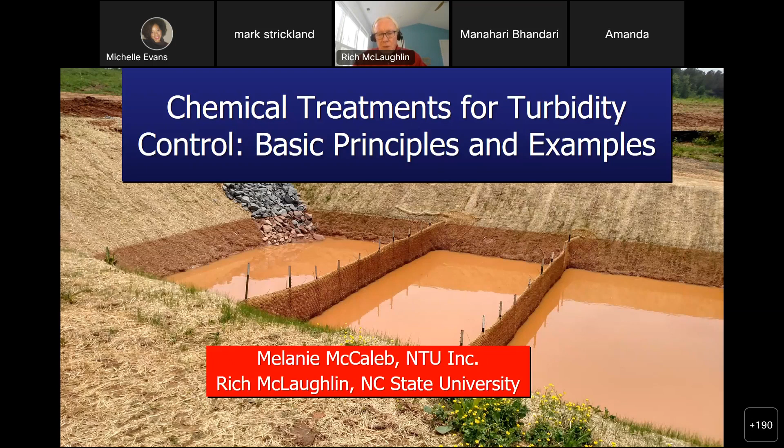So there's a couple of options we have for that, and that is to either filter it, which is a great idea, except that there's too much sediment in this water generally on construction sites, so a filter will clog very quickly. We could infiltrate all the water, and that would be great if we happen to have the right situation with permeable soils and maybe deep groundwater, but that's not going to happen in most cases in North Carolina. And so the third choice is what we're going to talk about today, and that's chemically assisted settling, which is very effective and very inexpensive if it's done correctly.

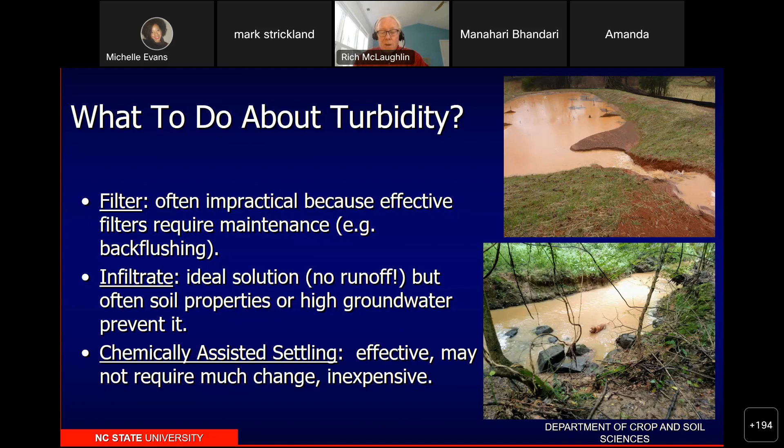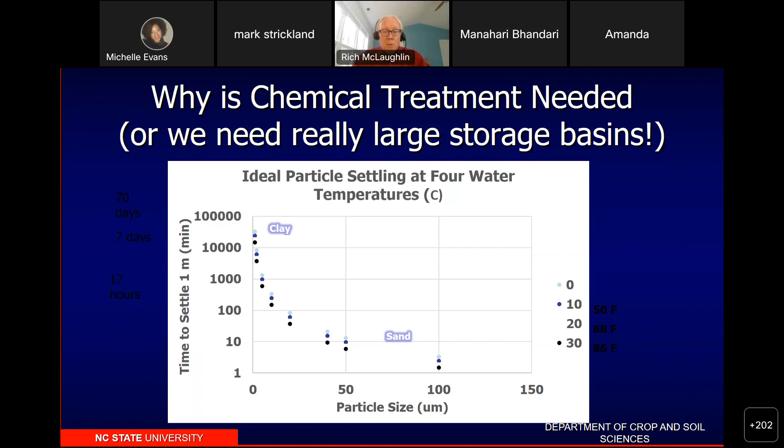So speaking of excellent practices, let's talk about that. We need to make sure that in addition to the chemical treatments that we'll be talking about, we are pulling out all the stops to reduce erosion and control sediment up on the watershed. So, for example, areas that are not being worked should be covered up. If they're not going to be worked for a while, there should be some vegetation there. Ditches should be lined.

We found that the ditches themselves, water conveyances, if they're bare, they may actually produce most of the sediment that you have in your basin. And so having good linings and check dams will prevent that from being a major source. So what we're trying to do is keep the sediment under control, except in the areas that we have to have active working.

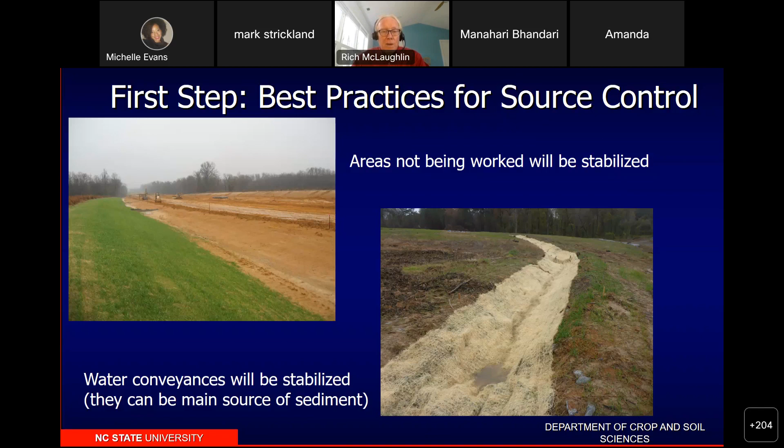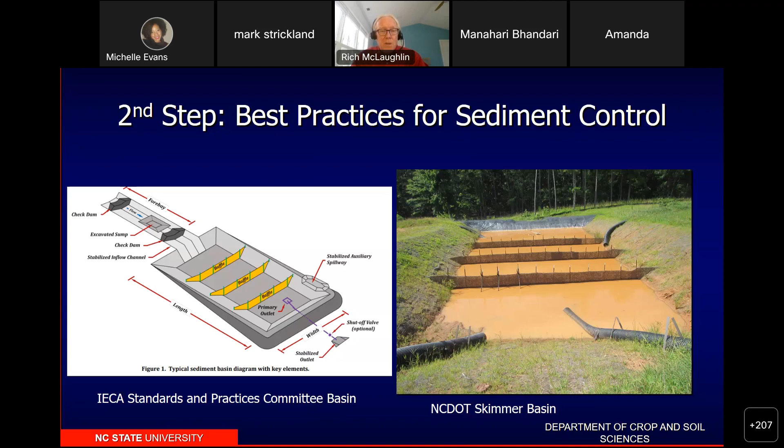So we're bringing the water in the pipe, so we don't have erosion on the sides. We've also got grass and matting, and then a protected dam and a skimmer. Those will all really help in retaining sediment. But again, we're not going to be able to retain the turbidity or the fine suspended sediment, even with these excellent practices. So for chemical assistance, we can go a couple of ways.

One is using coagulants, and some good examples are alum and gypsum. There are a lot of iron-based compounds that are used out there in the water treatment business, not so much in turbidity control for construction sites. And these are okay, but they need to be applied in very large doses in order to be effective. And in fact, they may actually create low pH, and they may create excessive aluminum above state standards to dose enough to get the actual treatment we want.

So we moved away from that whole class very quickly because it's very difficult to get the amount of material out into the basin. And we moved instead into flocculants. And the main two that we use on construction sites are polyacrylamide and chitosan, and I'll talk about those in a minute. And they're very effective at very low doses. So, for example, a pound of polyacrylamide can treat 120,000 gallons. So you don't need much. 1 or 2 parts per million usually will do the trick.

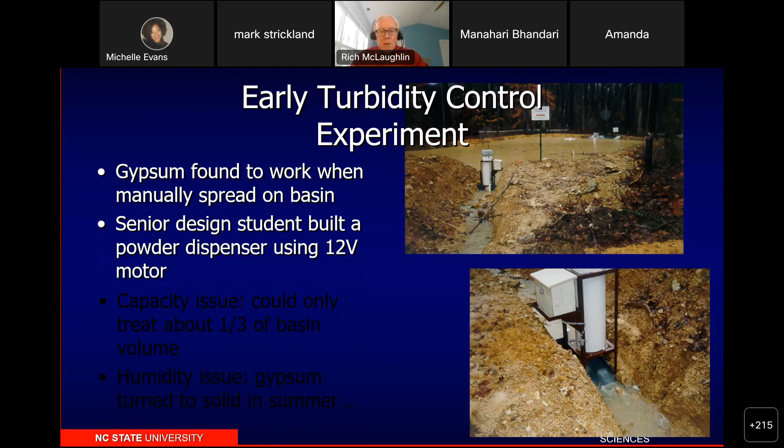So just kind of a funny example here, you see an early experiment we did with coagulants. On the right, you can see the pictures. It was a dispenser that was built by a senior design student. And what we found is it was an excellent design, but the gypsum would turn into a solid block when it got humid outside. So we had to toss that idea. It was fun while it lasted.

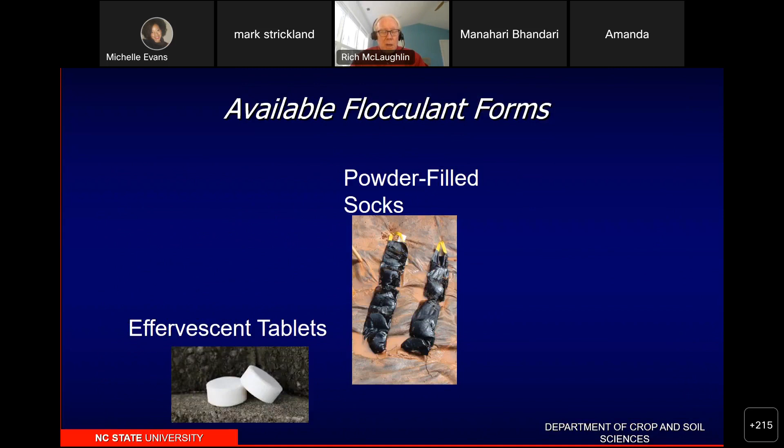Okay, so what else do we have? We've got different types of products like the effervescent tablets. Melanie uses a lot of those. We've got powder materials. That's the basic form that polyacrylamide comes in, and it's actually the cheapest form if you're going to use large volumes. You can have these socks that are filled with powder. Those are chitosan mostly, and there are some other chemicals that are used in those socks.

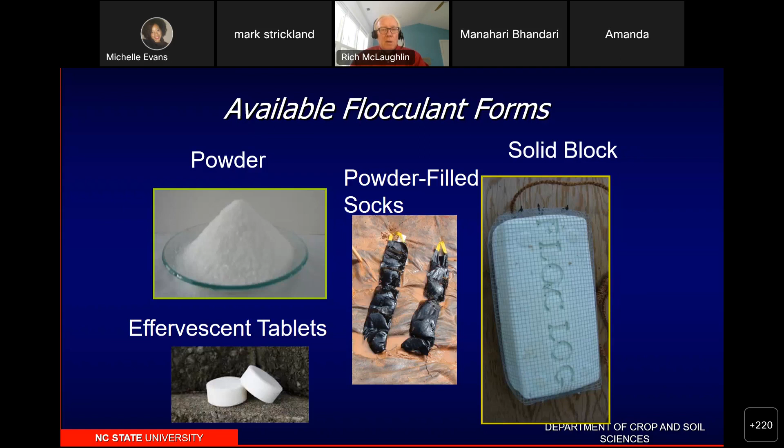And then finally, we have solid blocks, and many of you are maybe familiar with these. That's a proprietary product right there, but there's a number of them out there. So these are different ways that we can dose the water to get this flocculation, to get the polyacrylamide or the chitosan or other products up in the water column and start to dissolve and cause a flocculation.

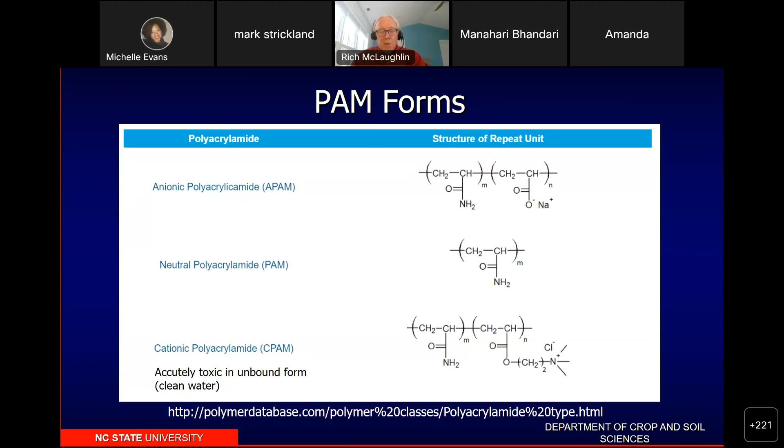Just a little bit of chemistry here. So we have anionic polyacrylamide, and that's mostly what we use. There are some neutral or non-charged forms that also can be effective. But at the bottom, you see the cationic or positively charged polyacrylamide. And generally, we don't use that because if it accidentally is spilled in clean water, it can be toxic. The other two forms are not toxic at all. Now, if it's applied to muddy water, the suspended particles will neutralize that and it won't be toxic. But still, in most cases, we don't tend to use that.

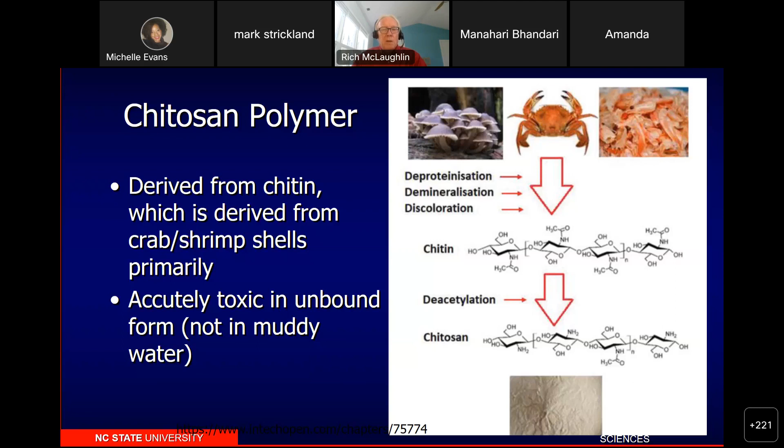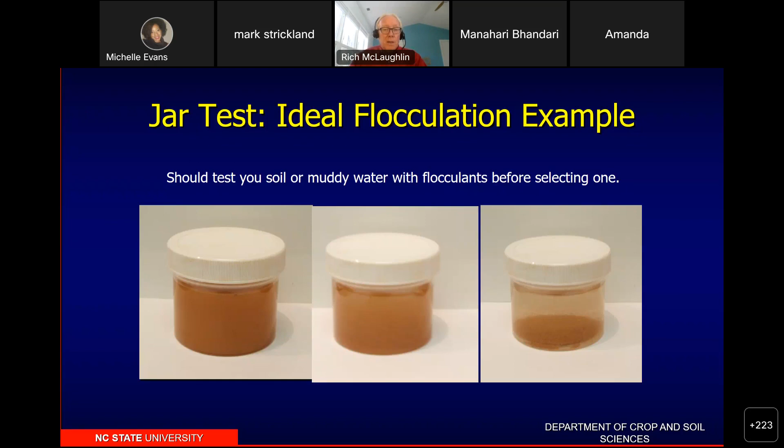We're mostly going to talk about passive dosing today. That's where we allow gravity to flow or move the water, and we put the product where the water is flowing. One of the situations that works really well is to put it on check dams. And we recommend using check dams made of a natural fiber because they have a lot of surface area and this powder will stick to it very nicely, but still dissolve. So what we recommend is you apply some to the check dam and then some to the blanket on either side of the check dam.

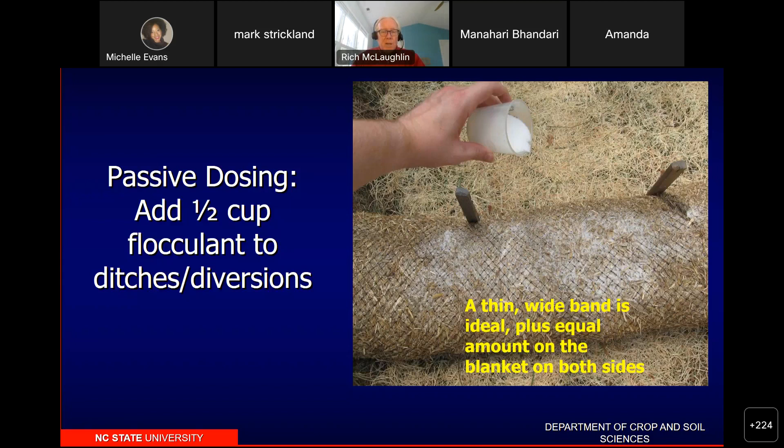And the reason for that is that when water is flowing at a low rate, it may not overtop the check dam. It may go through it, and then it wouldn't get dosed if you only had the polyacrylamide or other product on the top. So put a little on the blanket and a little on the top. And the amounts I'm showing here, this half cup total that you put out, that's just something we came up with. I can't say that that was scientifically derived, but it seems to be a good amount and works pretty well in a lot of different cases.

So I'm not going to go over all our experiments. I should have mentioned in the beginning, Melanie and I used to do this type of seminar, but it would take all day. So we're packing in a lot of information from our all-day workshop that we used to do.

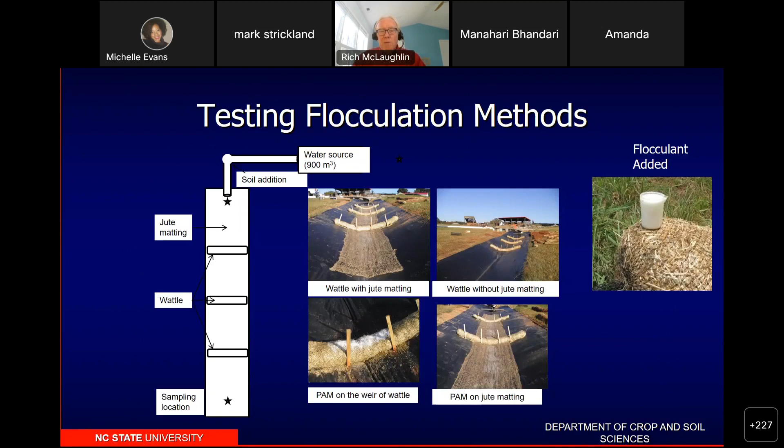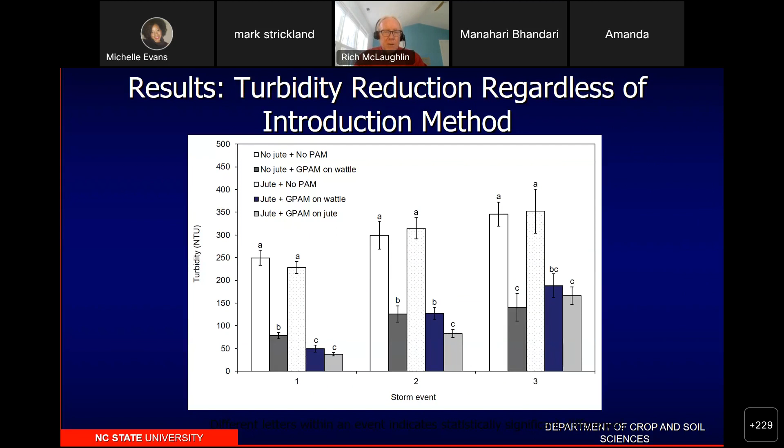So here's an example of an experiment we did where we wanted to just see what the best application method was, whether we put it on the blanket, put it on the wattle, put it on both. And the bottom line here, you don't need to spend a lot of time looking at this, but the open bars, the clear bars, are where we didn't use PAM. And the solid bars are where we did use PAM. And it didn't really matter where we put it. We got pretty good treatment, reductions of 70, 80% in turbidity. So that shows you that you just need to get it out there and get the water running through the treatment zone.

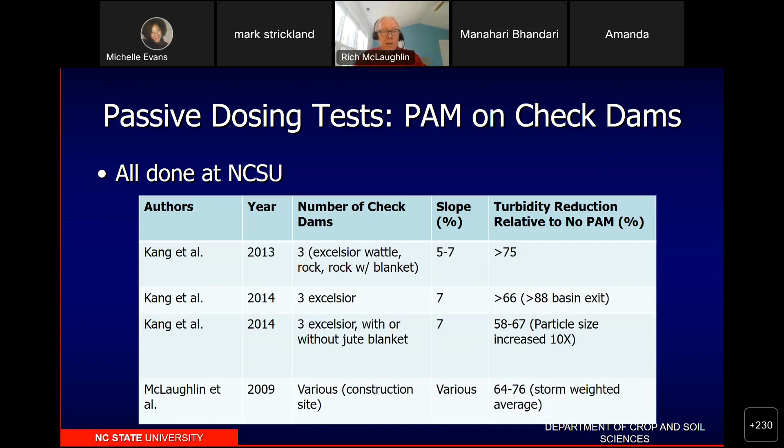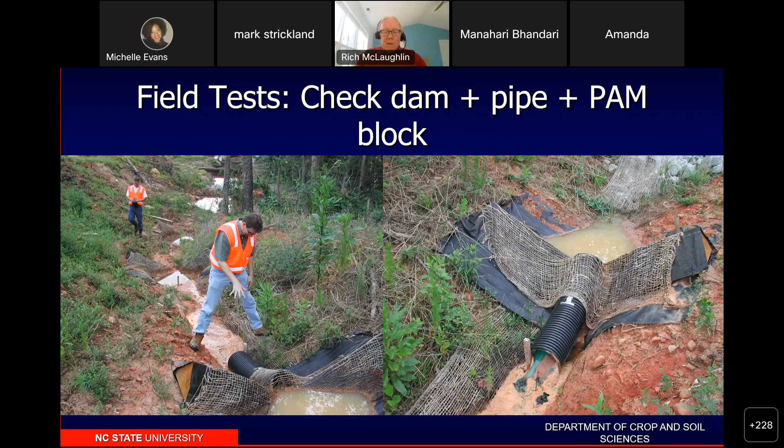So instead, we would suggest that you cover it up in some way. In this case, we were putting it in a pipe and putting the pipe on the check dam. You can also drop it into storm drains, or put it in pipes that you have on a site, such as slope drains. That's a great place—just cut holes and put the blocks in there.

You could put the other solid form, the effervescent tabs, in there, or you could even put the powder in there if you put something for it to stick to, like a blanket. So lots of options—wherever water is moving, we can do a treatment.

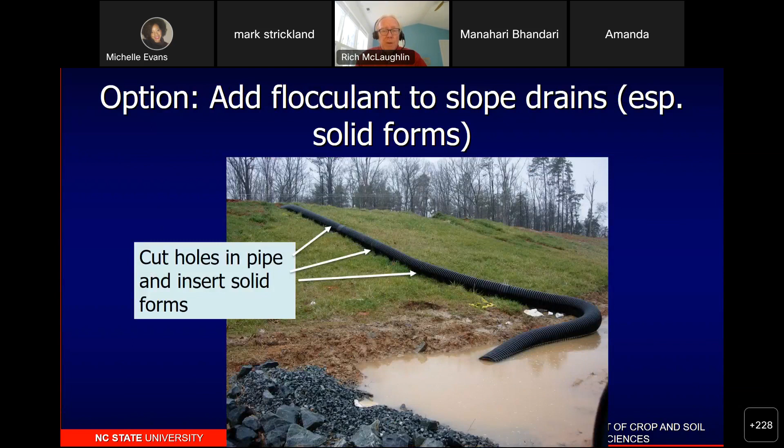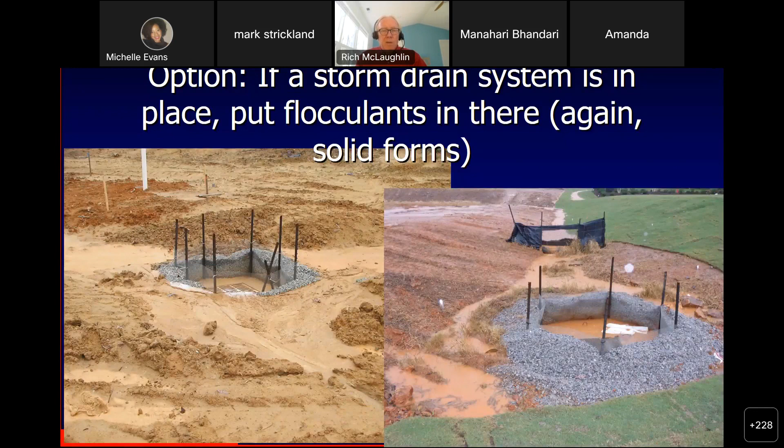So at inlets, you put it down, and hopefully you've got a basin that this is draining to—that's another critical aspect. We have to drain treated water to someplace where the water will pool and the sediment and the flocs will settle. So you never do a treatment as it leaves your site. You want to treat on the site, settle it, and then send the clear water off.

So here's the storm drain system that's already in. The block on the left is pretty much covered up, and on the right you can see it's not, and that shows you that you need to place it carefully so that it doesn't get covered up with sediment. Otherwise it won't dispense any product.

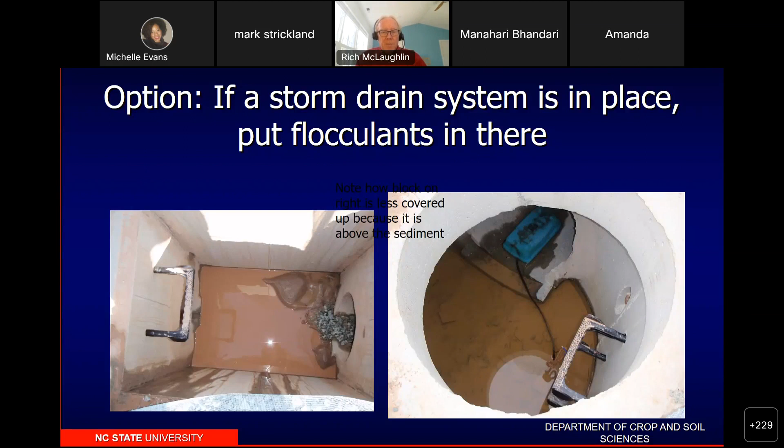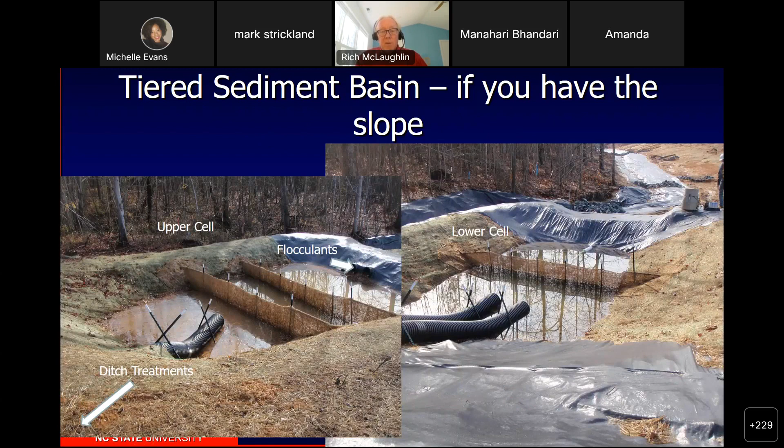Slope drains as part of your basin system. Here's an example of a tiered basin with two cells, and as you're moving from one cell to the other, you can put in your product inside the pipe, as you see there, and get a pretty good treatment there. This is an excellent treatment system, if you have the slope.

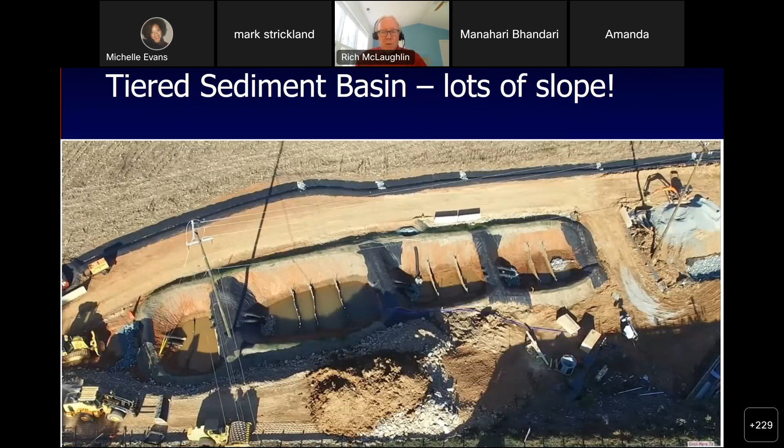Here's an example of a really large tiered system. Very steep slope—hard to tell from here, but very steep slope—but lots of opportunity to do treatments before discharge here.

So one of the questions people have is, here we are talking about adding a chemical to water that eventually is going to be discharged into streams and rivers. And so we want to make sure that that chemical is not going to cause any problems when it gets out in the environment. Some things we already know: it's very non-toxic. The anionic form especially is very non-toxic.

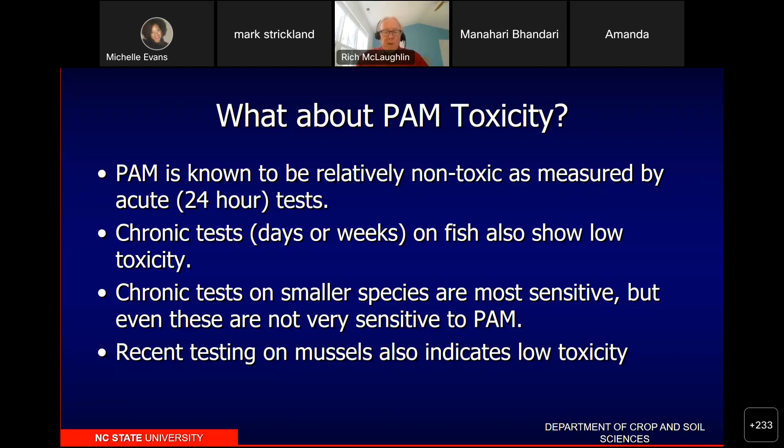Chronic tests—that is, exposure to the chemical for a period of time, weeks or so—tend to show also very low toxicity, so that's not really an issue. High doses on smaller species like Daphnia, which I'll show you in a minute, show a little bit of sensitivity, but still not even close to where we dose. So we feel pretty confident that these products are not very toxic.

So the basic principle of toxicity is that everything is a poison. It's the dose that makes the poison, and that's something to always remember. Paracelsus said this in 1580 or something like that, and that's the basic principle of toxicology.

So, some examples: you can actually drown in water if you drink too much, and snake venom is sometimes used for wrinkles.

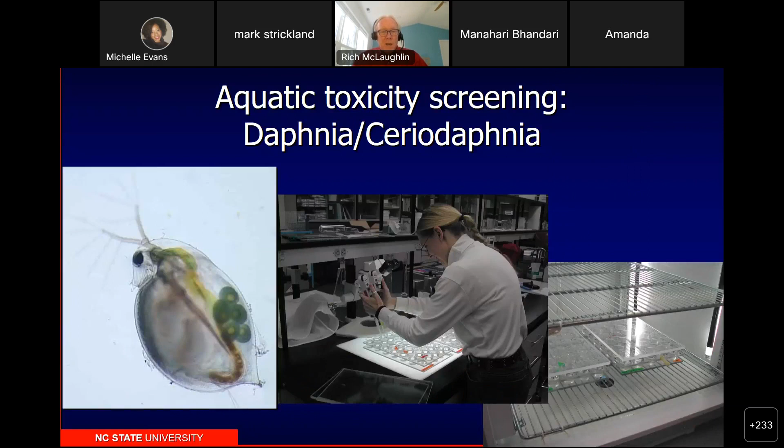So here's our test animal that the state uses, and North Carolina uses quite a bit—Daphnia. They expose them to chemicals at different concentrations, and from that they can come up with an idea of how much is allowable in state waters that will not have a negative impact on aquatic organisms.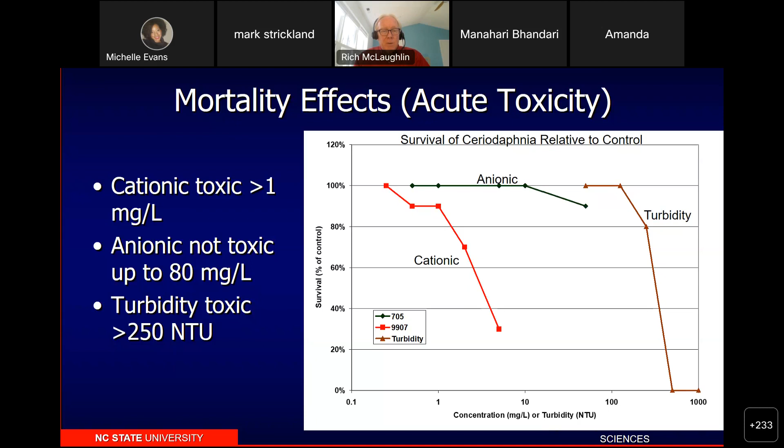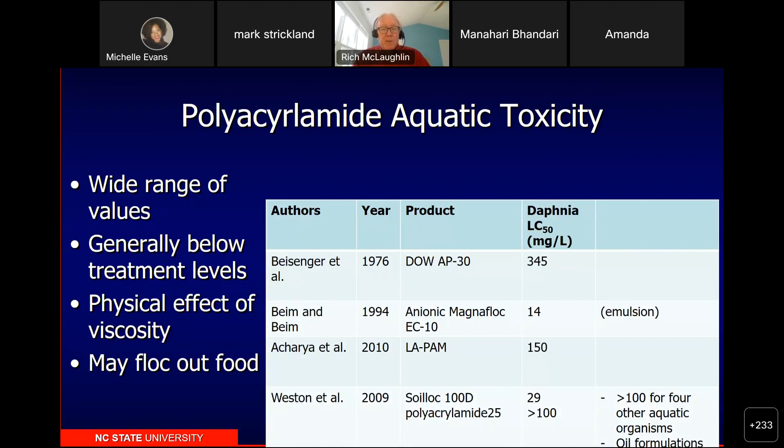Some examples out there—again, these are numbers that people have generated with other types of, mostly, anionic products. The one that's low, the 14, I think that's an emulsion, and emulsified products, which you can use, say, in a hydroseeder, tend to be a little bit more toxic. So it's the emulsifying agents that are doing that.

We did do a very large test on campus looking at freshwater mussels, different species, different life stages, and the bottom line is the doses required to get any response only showed a response in some of the species. You can see 1,000 parts per million did not affect the animals in most cases.

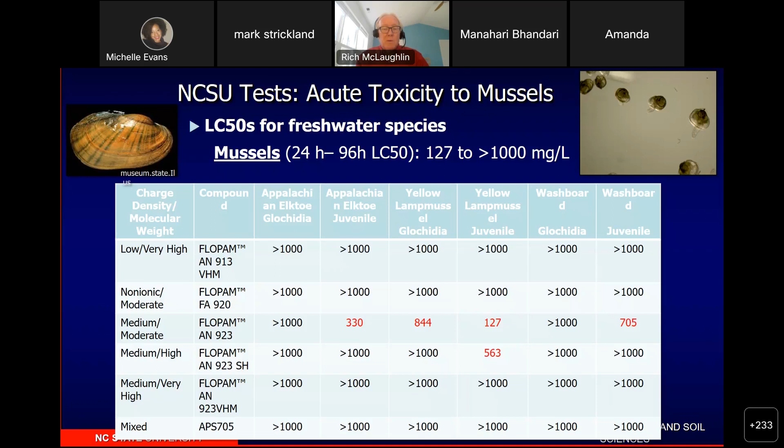That's again 1,000 times higher than we would normally dose, so we think it's a fairly safe margin in doing our treatments.

There is some concern about acrylamide. There is a little free acrylamide in the product for polyacrylamide. The bottom line is you'd have to drink a lot of water with a little bit of acrylamide in there just at the dose where there's no expected effect. You'd have to drink 28 liters a day to get to the no effect level, and that's probably toxic amounts of water.

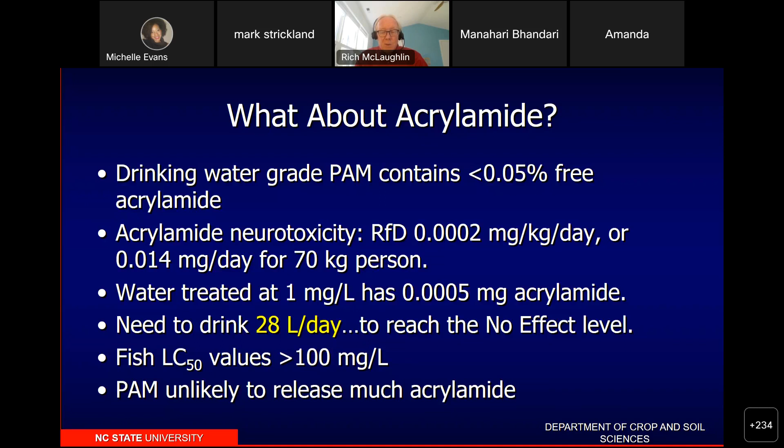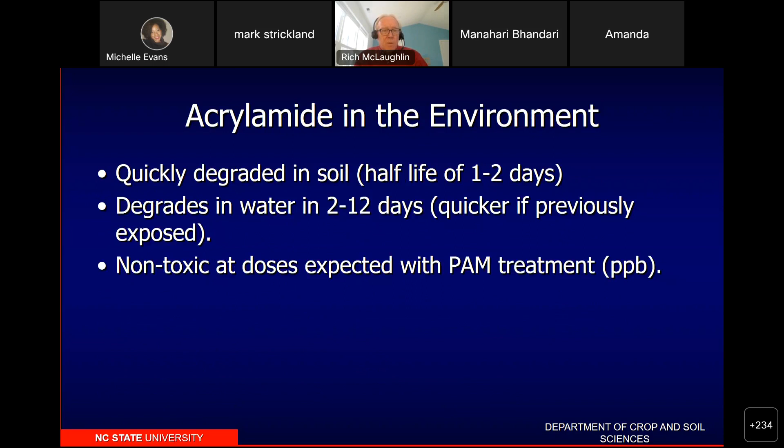Fish are not affected by this. It's very non-toxic to most organisms, and it quickly degrades in the environment. Acrylamide in the very small amounts that you find in polyacrylamide tends to disappear very quickly. It's sort of candy to microorganisms—they degrade it very quickly.

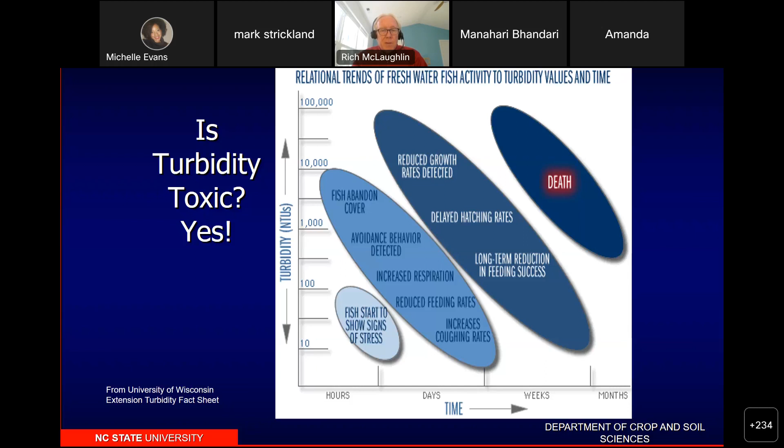Well, what about the other side of the coin—is turbidity itself toxic? This is an excellent example of how toxic it can be. If you look at the time of exposure and how much turbidity there is, you can see we've got lots of effects at fairly low amounts of turbidity. This is a summary of studies done all across the world, so we know turbidity is toxic, and that's why we want to get that out of the water column.

So conclusions: we know we're not going to see much toxicity with these products. We've done a lot of testing on that, but the turbidity itself and the suspended solids are toxic, so we really want to work to get that out of the water. The doses we use are 1 to 5 parts per million, far below levels where you might see any kind of toxicity. In my estimation, treating the water with flocculants is actually going to reduce the toxicity of the water rather than not doing any treatment.

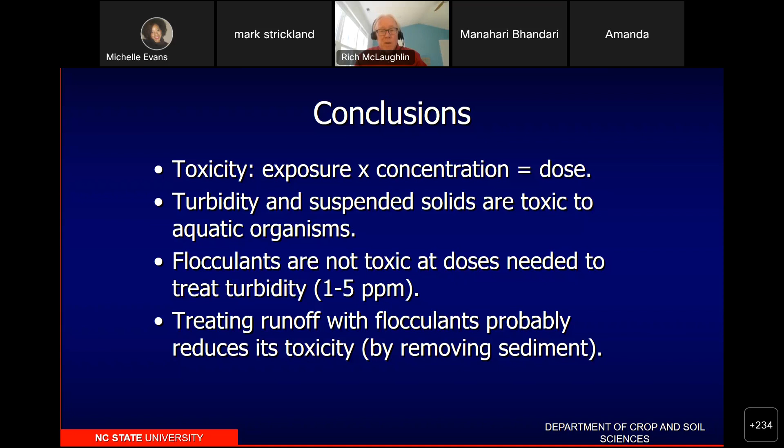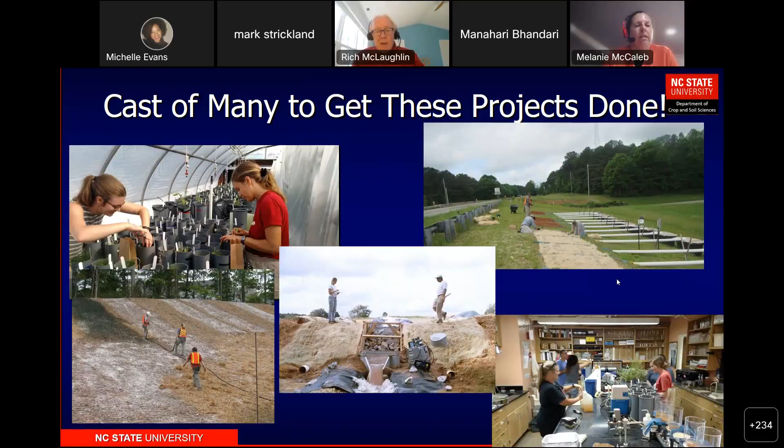So with that, we're going to move on to Melanie—if I can get my cursor to move. There we go. Melanie is going to be the presenter here, so take it away with all your great examples. Well, let's see, I got to figure out how this works again. So I am the presenter. Let's see... share at the bottom, yeah. I'm hoping—oh, there we go. Can you see it? There we go. Okay, good thing we practiced that.

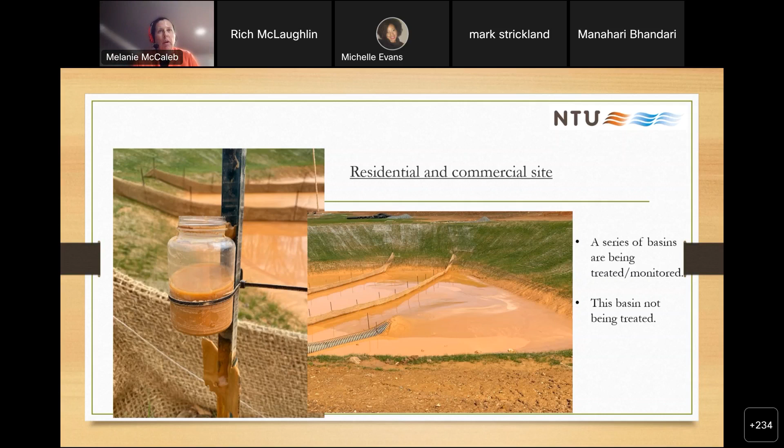But this was going to be our control, and because the basin needed cleaned out, treating it would not probably have been very beneficial—the outcome would not have been that great. So this one was left alone. Okay, then we had two basins.

They were counted as two basins, but basically it was a large basin split in half, with a forebay area running into another sediment basin. The forebay area was treated as a regular basin and had baffles and a skimmer that drained into the second portion of the basin. So this was set up, and we did treat both of the basins, A and B.

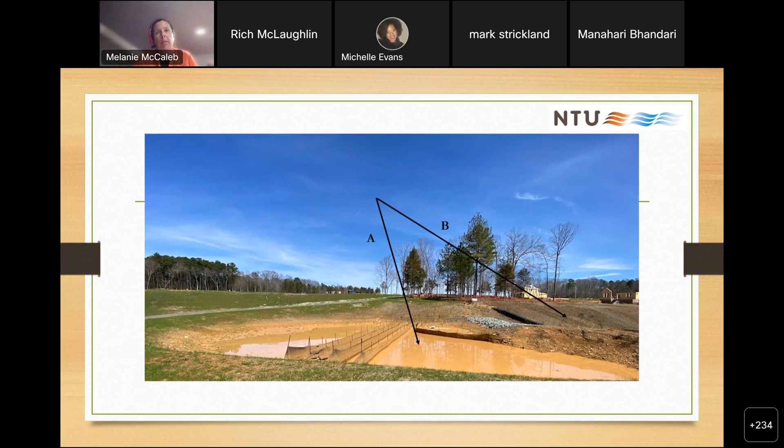Jumping right into what we found: basin A, after we had treated the basins, following a 1.5-inch rain event, we were getting turbidity values of 104 on the outfall, and about 87 coming out of the outfall of basin B, which would have been the second one.

So clearly we were getting some significant treatment, and it was very exciting to see. Initially, the first samples that were coming out of there pre-treatment were over 3,000 NTU. So very high.

With a little bit of polyacrylamide added, we were getting turbidity values knocked down significantly. Again, this was after a 1.5-inch rain event using the effervescent tablets. I believe in the next slide we're going to see what we were doing: treating within the slope drains that were entering the basin. So it wasn't even a whole part of the watershed. We weren't treating in the diversion ditches.

We were finding that those diversion ditches were often getting either removed or torn up, and this was on a daily basis. So we were trying to go to an area where the treatment was basically treating all of the water coming into the basin on a consistent basis. Treating within those slope drains entering the basin, we were getting all the water from the watershed. As long as it was entering those slope drains, they were being treated. And clearly that was happening with this basin.

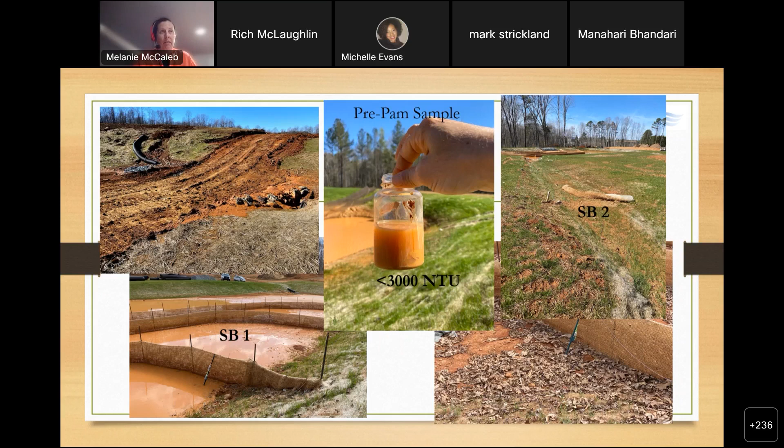On the right-hand side, that sediment basin 2, it wasn't nearly as active in grading and heavy machinery traffic. So we had really good stabilization in the watershed itself, in the diversion ditch, minus that scraggly looking wattle that got removed. But significant stabilization as compared to the basin right next to it with a different drainage.

And so what did we find? By treating just those slope drains -- I use the effervescent tablets a lot, they're very easy to use in the slope drains for me -- this is what I used on these basins: the effervescent tablets in the slope drains. The basin on the left, or the picture on the left, was from sediment basin 1, and we had on average, in this particular sample, 185 NTUs.

Both of these bottles were samples taken right around the skimmer itself within the basin. The image on the right shows 36 NTU coming out of sediment basin 2, which was the basin to the right of basin 1. It's kind of neat to see in the bottoms of those bottles evidence of flocculation, so we knew treatment was going on.

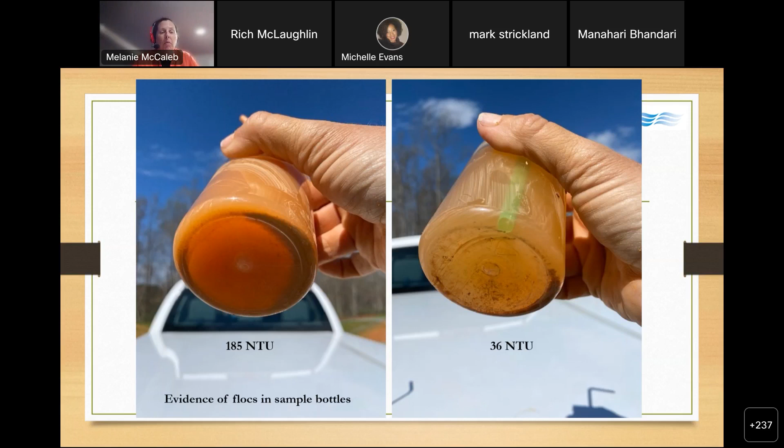While the basin on the left had a higher value overall, again because of that disturbed watershed and the inability to get some stabilization in those diversion ditches due to traffic moving in and out, even though it was higher at 185, it's still a far cry from the pre-PAM sample that was taken over 3,000 NTU. So while there was a difference, the overall outcome for both is significant.

And here's another image. So in order to measure those samples, just put them into the glass vials that go into the actual turbidity meter. And you can really kind of see the difference there. Rich was saying earlier in the presentation, 70, 80 NTU is kind of like a weak tea.

So this is a little stronger tea at 185, but the 36, you can clearly see that there's not a lot of sediment in that water itself. And that was within the basin. So always consider that once the water is discharging from the basin itself, you're going to have continued treatment or continued settling of sediment.

Once it comes out of the skimmer pipe, usually there's a rock swale or a dissipator pad of some sort where more sediment can settle out before it's going out the outfall. Sometimes there's silt fence outlets or whatever other type of outlet that would be at the perimeter of the basin. Again, more settling, and with settling, cleaner water. So eventually, by the time the water leaves the basin, leaves the job, it would be even cleaner than that.

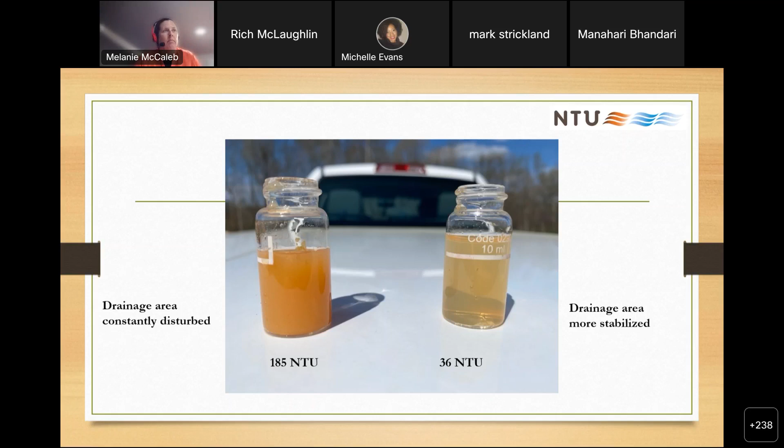This was another sediment basin. And again, these are still ongoing, trying to collect samples as often as possible, more for presentations and whatnot, but not a requirement on jobs.

So decided to treat within the slope drains. Again, these watersheds are extremely active, disturbed often. And so in order to make sure that the water that was entering the basin was all being treated, it was just easier to treat within the slope drains entering the basin.

So you can see two different types of applications for getting the effervescent tablets into the slope drains. Highly scientific there on the right-hand side with my suet cage that I find incredibly easy for those tablets. They fit perfectly in there. And there's a little hook at the end of the chain, and it just fits right on the lip of the slope drain.

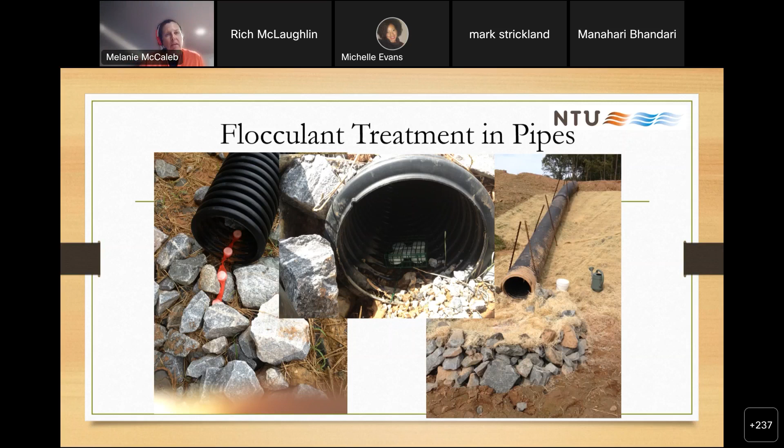So that big basin, even though the watershed was continuously disturbed and vegetation was continuously disrupted and a lot of energy and activity was happening within that watershed, treatment was certainly happening within the basin.

The image on the left shows the outflow of the basin at this particular storm event, 20.2 NTU, and within the basin it was 115.3. So overall, great application, great treatment, and very pleased to see the success for this one.

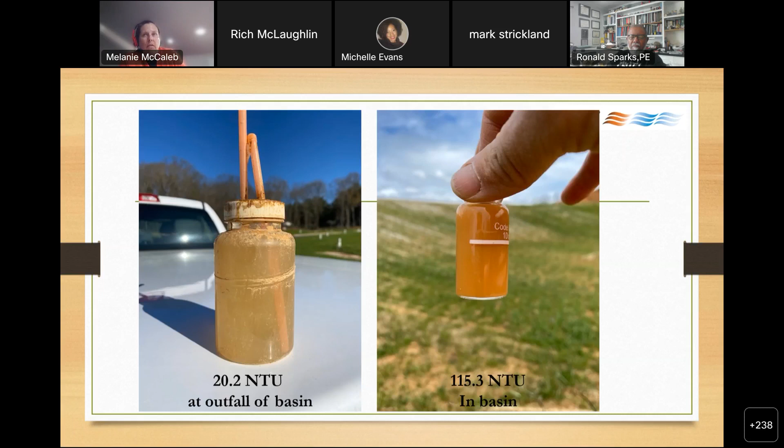Again, though, if I can go back, there was a lot of variables that went in to help, not just the use of polyacrylamide. I think that's one of the caveats with polyacrylamide. It certainly is not going to work alone. It can't work if there's an overload or abundance of sediment.

Rich showed you the placement of the polyacrylamide logs in the storm drains, and if there's too much mud or too much sediment, they get covered and don't work. It's kind of the same premise with all polyacrylamide. If there's too much sediment, too much work, it can only do so much. So when you have sediment basins designed with stabilization, baffles, slope drains, skimmer pipes, and stabilized diversions, and then polyacrylamide there to really polish up the water instead of having to deal with overloads of sediment, you have great results.

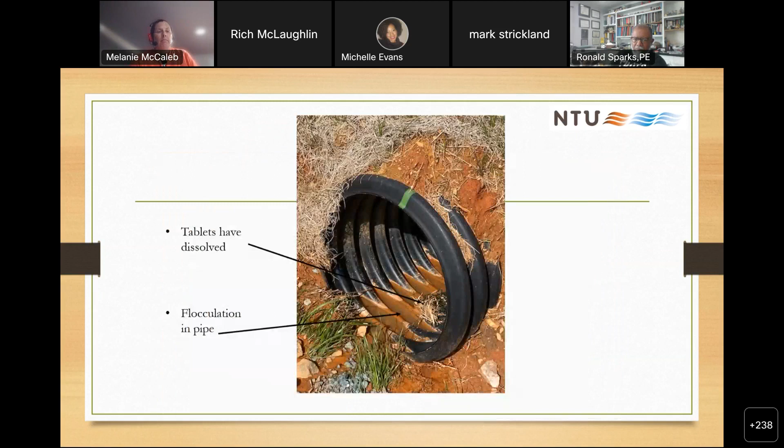Okay, moving to a completely different site, and this one was actually one of my favorite jobs I was brought into. One, because it was a small site, and two, because all of the water drained to one sediment basin. I've not had that happen again, but it's very easy to control an entire site when it all comes to one central location.

The first sample on the left was over 3,000 NTU, and that was before polyacrylamide was added. The middle image, number 2, was post-PAM application after a 0.6 inch rain event, and the sample was taken near the skimmer head in the basin. Number 3 was also post-PAM application, same rain event, taken in the basin at the first baffle, closest to the pipe coming into the basin. The second one was closest to the skimmer head, and the first was pre-PAM. I did not get a sample from the outfall at this point.

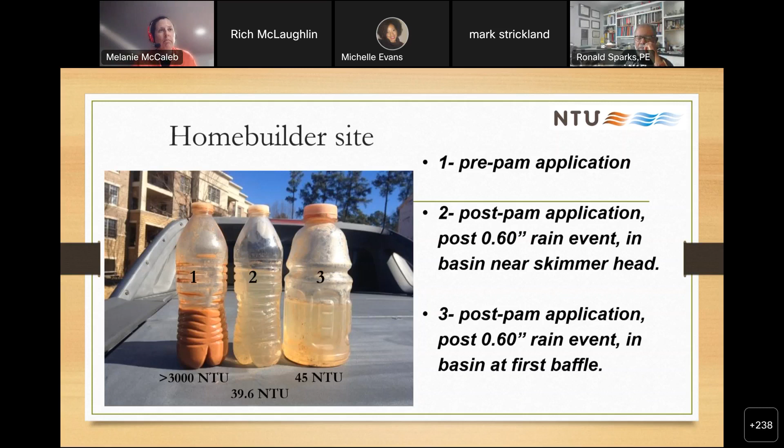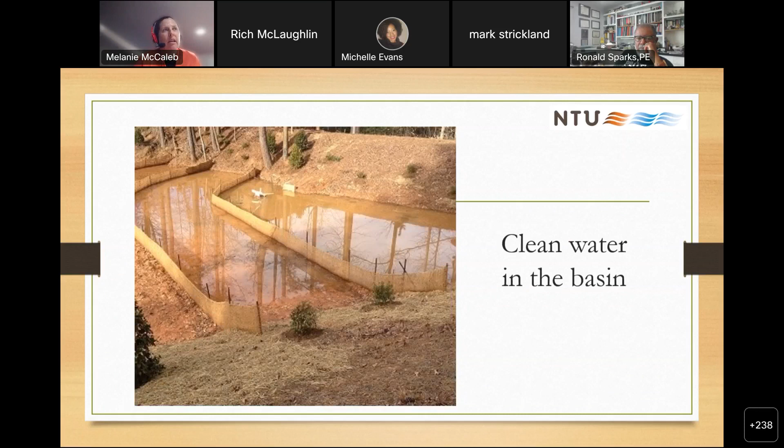Here you can see this is the sediment basin where all of the water is coming to, and there is clear water in it. It worked tremendously well. How did we treat it?

We did a couple of applications, or different types of applications. One, we had a lot of drop inlets, yard inlets, or curb inlet protection along this one main street, one large watershed draining to the one sediment basin. So we decided to add some polyacrylamide to the yard inlet protections, adding some Excelsior fabric around that stone to have more surface area for the granular polyacrylamide to be applied. You can see on the right hand side the material where we used the granular PAM to treat the water coming into those areas.

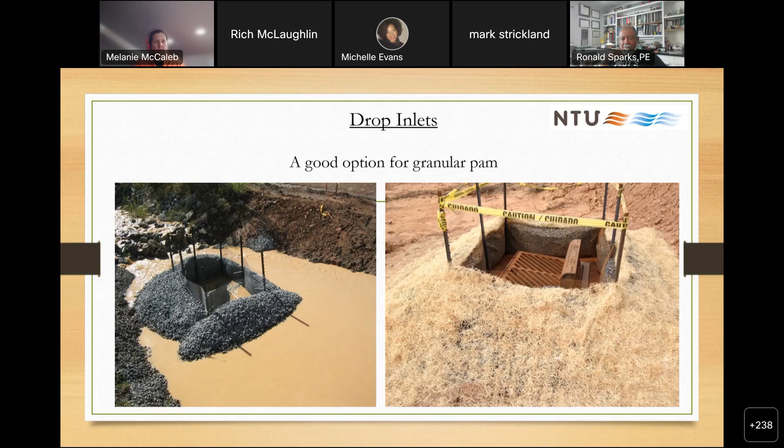And then we used the effervescent tablets in the storm pipe coming into the sediment basin. I didn't have a place to hook up the tablets in their suet cages, so I used some wattles stuffed with large wood chips, and I blocked off the end of the flared end inside the sediment basin just to give it a pooling area. And that worked really well. So after that 6/10 rain event, it dissolved the polyacrylamide, and you've got clear water within the pipe with noticeable flocculation occurring in there.

This is where the pipe discharged directly out into the small plunge pool inside the sediment basin. You can see again clear water and staining on the leaves and the stone where the flocculated sediment has settled out of suspension there.

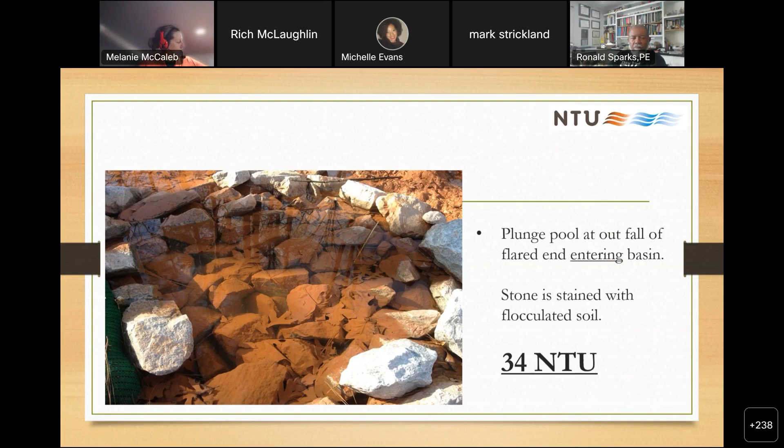This was the outfall. The one on the left was the outfall of the sediment basin on this job, but the second one is a different outfall. I just like the idea of this. So while neither of these outfalls were treated with polyacrylamide, they certainly could have been.

Rich was saying one of the caveats with polyacrylamide is that you want to make sure you are treating and then capturing the treated water and soil, letting the flocculations settle out before you discharge from your job. Most of the time, treatment will occur either before the basin or in the basin so that the material can settle out in the basin and clean water can discharge from the basin itself. If you have a treatment zone beyond the sediment basin discharge point, then you are essentially still collecting flocculated material. The image on the left shows a perfectly fine treatment zone.

You could treat within the stone area where there is excelsior material placed on it. Water comes out of the sediment basin, still comes into contact with polyacrylamide, and then you would essentially have a treatment area below that where any flocculated material would fall out.

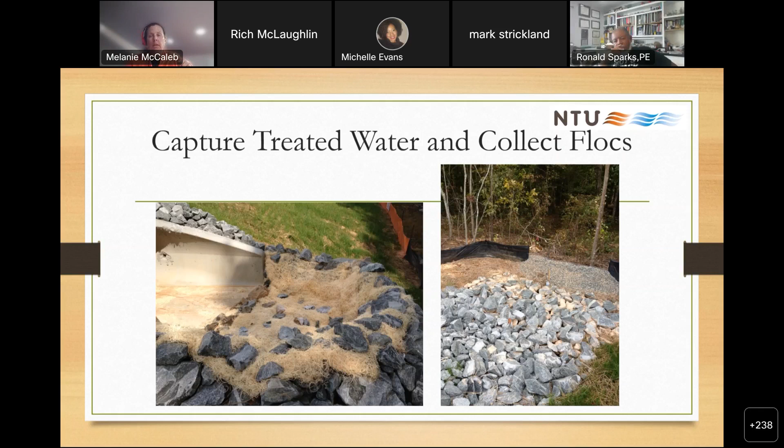So we had discharge from that one basin, and these are kind of on average overall turbidity values. So the flared end directly discharging from the skimmer pipe, or near the skimmer, I should say, 25.3 NTU, and then the silt fence beyond the outfall, so beyond that silt fence outlet, 8.88 NTU. So we're still getting treatment even beyond the initial outfall. By the time it actually leaves the site, the values of turbidity are still dropping out.

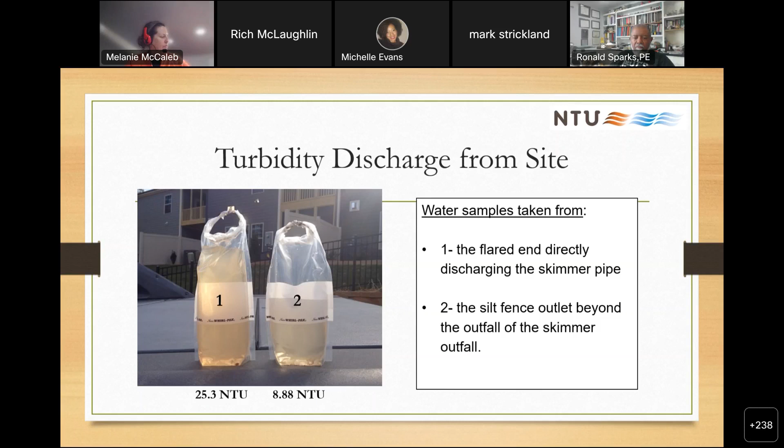I did notice last week after everything was installed that none of the wattles had actually been stapled down. So that is a really important thing. They had them installed and they had the wooden stakes holding them in place, but especially when we're trying to slow water down in a diversion, the water has to have a barrier. And while we had those wattles installed in the ditch, if they're not properly installed or stapled down, the bottom of the wattle stapled down into the ground, the water certainly is just going to run right under them.

So that was made aware to the contractor, and they had the guys fix them that afternoon. So glad that I saw it. Otherwise, treatment would have been bypassed. So that's a new site to keep an eye on. Okay.

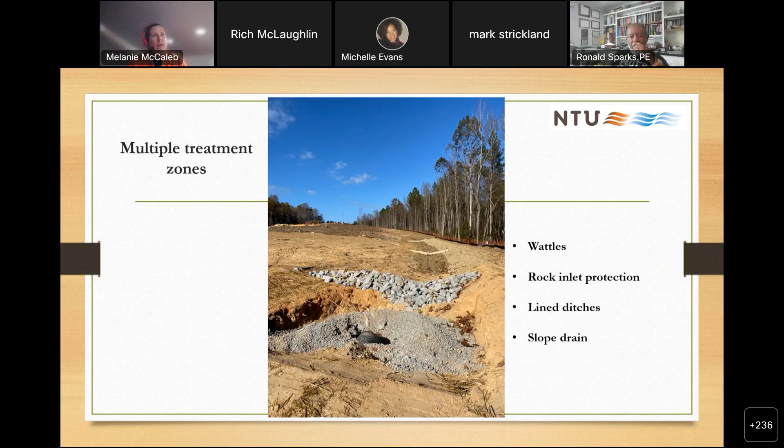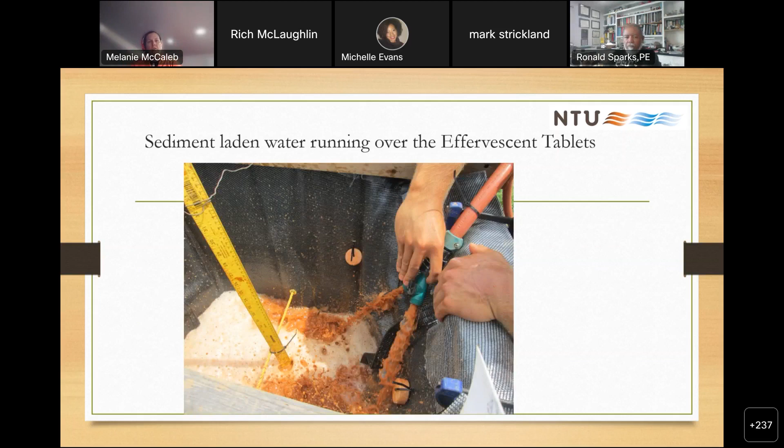A couple of quick little studies that we did for this particular one was with the effervescent tablets, looking at silt sacks, a proprietary, but essentially a curb inlet protection bag, to see if we could treat within the bag itself. And so we ran a bunch of sediment laden water into the curb inlet bags, ran them over the effervescent tablets to see if we could get the effervescent tablets to dissolve and get treatment within the bags, and what kind of water we could get coming out the underneath side.

So the first test, we saw turbidity reductions in the 40 to 50% range. And then the second and the third test, we saw significant reduction, upwards of 90 to 95% turbidity reduction. And what we noticed is that after the first test, we were getting more of that blinding, or the bags were becoming more of a filtration device with the polyacrylamide in conjunction with it. So it worked really well. But like any BMP, the more sediment that you collect, the more often they have to be replaced or maintained. So maintenance is also a really important factor to take into consideration when using polyacrylamide.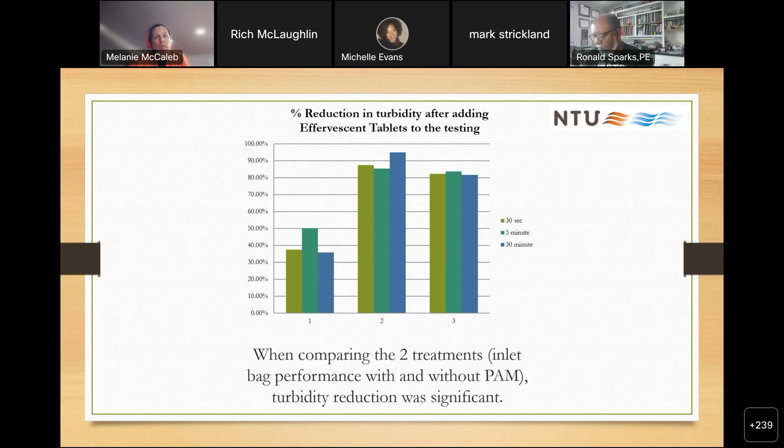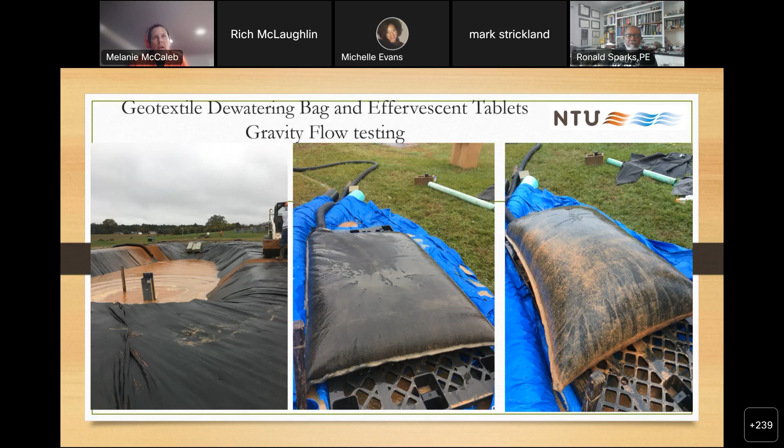And then I think this is lastly looking at another way to use gravitational flow. Rich talked about that with filter bags. Usually these are in a pumped setting with mechanical operations and mechanical pumping. We wanted to see if we could hook these up to a skimmer pipe outfall and just let gravity and the drawdown of the water run through the bags that were dosed with the effervescent tablets to see if we could get any reduction in turbidity just from gravity. And pretty preliminary, probably need to do this a couple more times, but there were reductions in turbidity overall.

And to treat just turbid water, it becomes a little more difficult. But nonetheless, with the geotextile bags, we were able to get pretty good reduction in turbidity. So that's another handy tool to have in your toolbox. So with that, I think that's all I had.